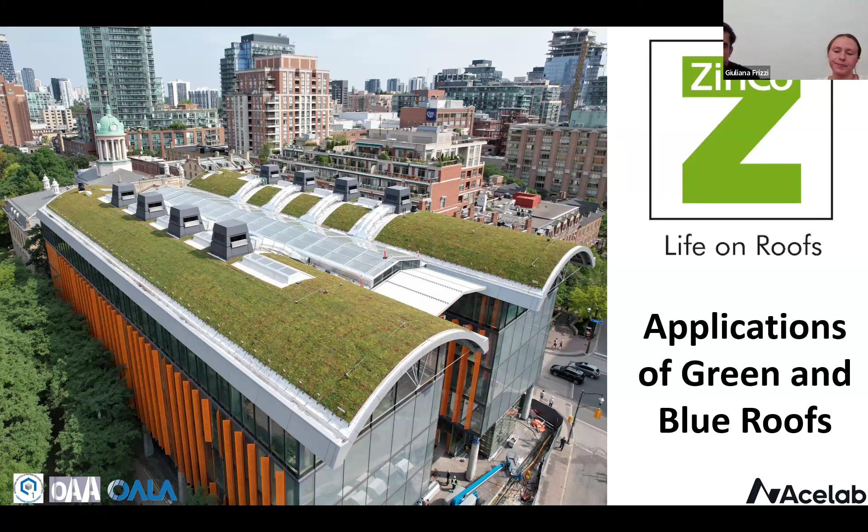My name is Jeremy Wright. I'm more on the commercial project management and roof technicality side of things, so I do a lot of the estimation and on-site project management for jobs. And I'm Giuliana, I'm the civil engineer on the team. So how me and Giuliana work is traditionally we operate as the consultants for large-scale commercial projects. So we are a design, supply, and consult company.

We used to be a full turnkey operation back in the late 2000s and up until about 2016. We are a supplier, and we basically work with architects, landscape architects, civil engineers, and building envelope engineers to specify roofing materials, but more specifically green roof materials, to create landscape spaces on top of waterproofing membrane, not just shallow, extensive green roofs. We do a lot of intensive green roofs as well. And so we're basically part of the project from start to finish.

We start with the consulting and the design work. A lot of the engineering is managed by Giuliana. We'll go through the tender phase, and then we work with the installers all the way to the finish line of the project to make sure that it's installed properly. And then we also support the project by creating maintenance plans for the various types of vegetation on the project. We're located in Toronto and Vancouver right now, but we do consulting and ship to the States. And so we're very much looking forward to dealing with more North American projects in the future.

So a bit of an agenda for today. We're going to talk about our types of green roof systems, which are built in place green roof systems. We're going to talk about growing media, a very important topic in green roofs and kind of the backbone of a good system. We'll go through the discrepancies between extensive and intensive green roofs, stormwater management, which is Giuliana's specialty, and I'm going to talk about solar as well. If there's any questions, we'll get to them at the end, but there's lots of information, so feel free to reach out to us after the presentation if you have any questions.

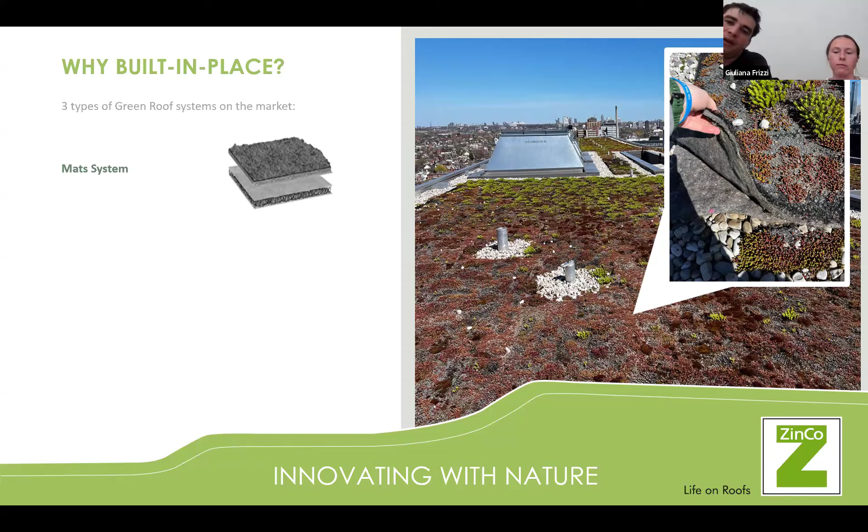A lot of the reasons why we don't do soilless systems is because we call them roofs on drugs. Essentially, plants need soil and water to survive—it's food and drink. This is what happens to a lot of soilless systems: they constantly need to be fertilized and constantly need to be irrigated. It kind of defeats the purpose of the green roof. A green roof should be a self-sustaining system that needs minimal intervention from a fertilizer standpoint and an irrigation standpoint. This is why we don't do soilless systems.

The second system that's very common in the market is the tray system. We have a lot of great competitors in the tray market space—these are plant people that do green roofs. Tray systems are very common because it's a pre-vegetated system that you can install in a 2 square foot material install. We can do trays, but we prefer not to.

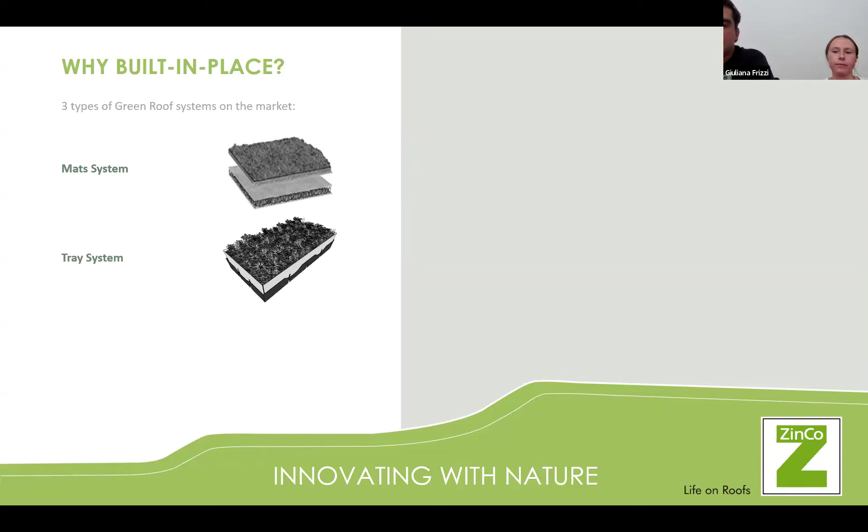The reason why is because we want to be able to customize the system and build it in place. So we are a built-in-place system. That means all of the material is brought to the roof and constructed, customized based on the vegetation type, the roof loading, the stormwater management requirements, and the configuration of the roof. A lot of roofs are irregularly shaped, so you don't have a perfect rectangle every time. That's why building the roof in place on top of the roof is the best way to do it. It's cost effective, it's bulletproof, and you can mix and match our assembly buildups based on what you're trying to build. We like to customize, and that's why the built-in-place system is what we do.

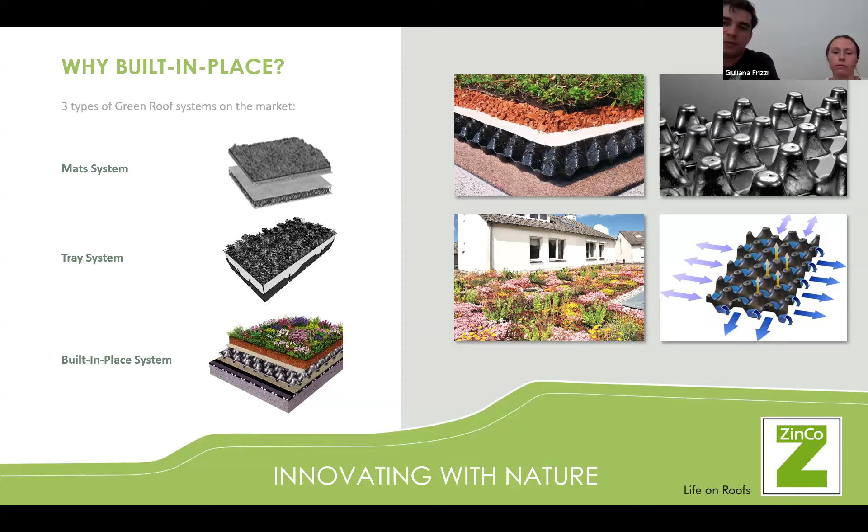When we do a built-in-place system, every layer of our system is a direct representation of a subsection of soil. What we're trying to do is compress nature into a very shallow format, and to do so you need a few different layers. The first layer that we put on top of the waterproofing membrane is a root barrier.

A root barrier is an impermeable layer. We've got two types: one with hot air welded seams, for trees or anything with aggressive root structures. The second type is a high density polyethylene sheet overlapped at about 2 meters or 6 feet, and that's loose laid on top of the waterproofing membrane, regardless if it's an inverted or conventional buildup. The second layer is a protection layer, which protects the roof from mechanical penetration or any damage in the future from the weight of the green roof sitting on top of it. Those two layers are the protection layers of this assembly.

Now, when you look at the cross section of soil, the groundwater subsection is where a lot of the water is stored. In a natural environment, the plants and these types of ecosystems that we're trying to replicate, their root systems are going down into the crevices of the rocks, trying to find that water source. A lot of the times it's very deep.

So what we do with our system is we have a water retention and drainage layer, which mimics the groundwater subsection of soil. This is like the sippy cup for the plants. It's also aeration for the soil. It's very, very important to have high aeration in the soil in order for the root systems to grow. And it's kind of our bread and butter when we deal with green roofs.

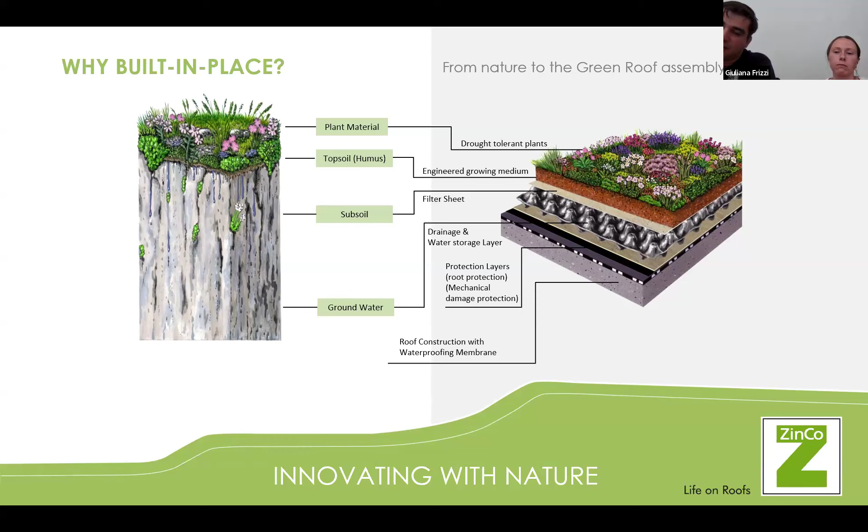And then for the plant material, drought tolerant plants, always. We do a lot of shade roofs, but they always have irrigation, and we always try to use as much native plants as possible. Those are the ones that last the longest, with a mixture of sedums as well.

So when we do built-in-place systems, and how we work from the consultant community is, you give us a design, you tell us what you want from an aesthetic standpoint and functionality standpoint for your roof space, whether it be the top roof is an extensive roof or a level 5 podium with trees. We take that information, we work as a team, decide which system is going to be best from a cost standpoint, shipping standpoint, installation standpoint, water standpoint, and then also configuration of the roof.

And then we come up with a spec. It's always kind of customizable for the project, although a lot of our systems can be replicated across multiple projects. And then we come up with a spec and we design it for the plants. The first thing you got to think about with green roofs is, what do the plants need? And then you design from there.

A lot of the times people look at what the roof needs and then they try to figure out what the plants need later on. You got to think about the plants first, because that's what everyone sees, and that's what determines if it's a successful system or not. So it's all customizable. Doesn't matter what height it is. It can be very shallow or it can be very deep. We have a green roof system for it, and it's all based on what the plant's needs are.

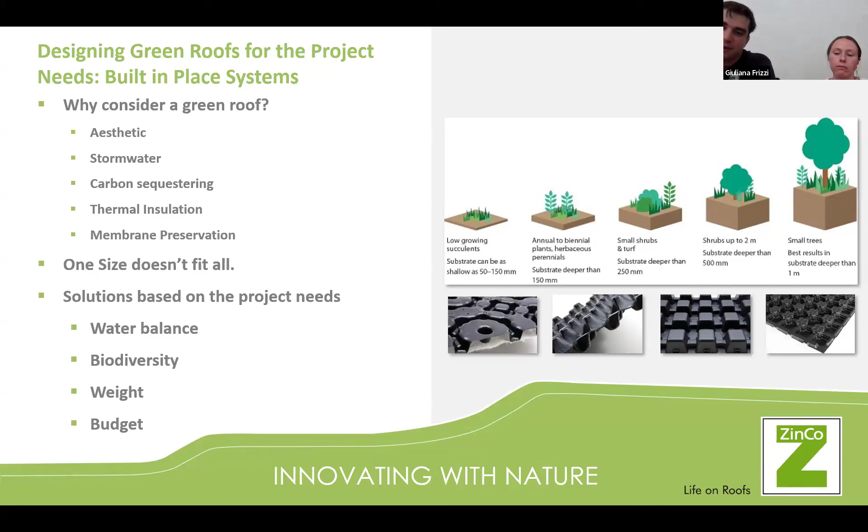Soil is a very, very important topic to talk about, because it's not topsoil, it's not compost, it's really low organic substrate. That's a good growing media. And we follow something called FLL. It's a very long German word that we're not going to try to pronounce, but it's kind of like the industry standard for a good green roof.

Now, it's an international standard. It was derived in Germany to start, but it's a standard that a bunch of different suppliers came up together to make, to ensure that the green roofs were going to have a certain quality for engineered soil, to make sure that the green roof industry doesn't suffer from poor soils. It's really important for us to follow those guidelines. It's a tough guideline to follow, but it results in really, really long-lasting and sustainable green roof solutions.

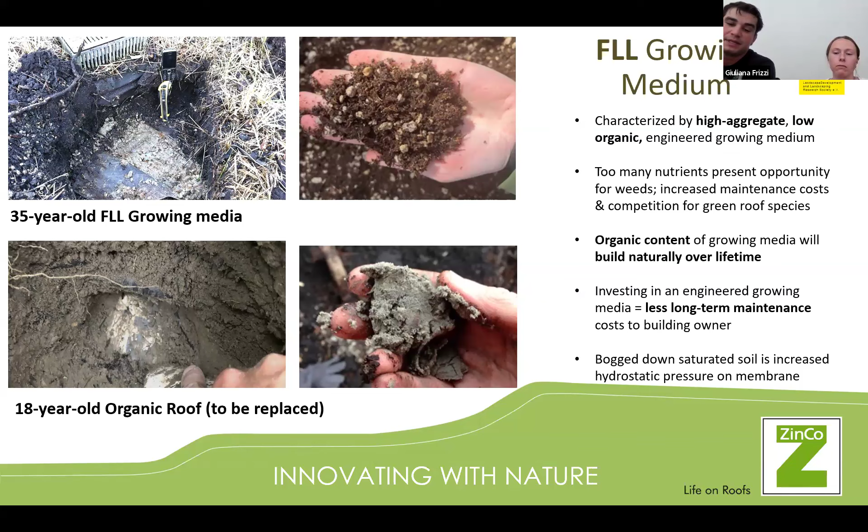What happens too, when the particles start to shrink and there's no space for air, the system doesn't drain. So they become a huge risk to a building or an asset owner, because these systems kind of turn into swamps or bathtubs. A really good example of this is a podium in downtown Toronto, 5 years old.

At the inception of the project, the substrate was going to be flush with the top of the pavers. In 5 years, this roof has degraded about 8 inches. A lot of people will say it's compaction or wind erosion, but it's not. It's actually decomposition, so it's gone into an anaerobic state. There's a lack of oxygen in the substrate.

What happens when you go into an anaerobic state in soil is these microbes start to basically thrive in an anaerobic state, and they start to consume the organic matter in the soil. That's why you see in a lot of old condos and old podiums and planters, the soil's kind of going down, down, down. You're starting to see the insulation that goes around the inside of the planter start to expose itself, and that's decomposition of the soil.

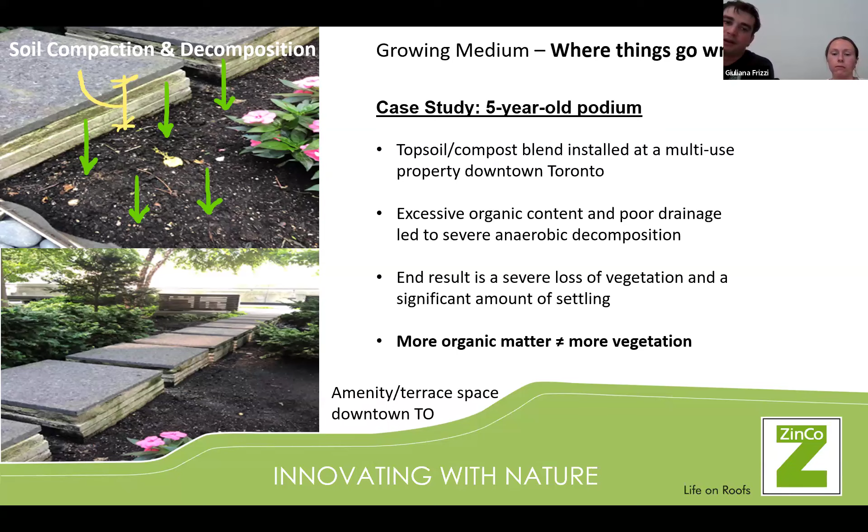So this is, you start with a cheap soil to install it. Everyone sees the price tag and says, okay, I'll go with the top soil on my podium. But podiums behave a lot differently than a ground level landscaping job. So this soil starts to compact or decompose over time. You have to bring that soil back up to the roof—this is a $300,000 fix, which could have been avoided if they had just bought a proper green roof soil. So we want to avoid this because it's not sustainable, and we just want to make things work and make sure they're bulletproof.

Throughout the presentation, we'll go through the 3 basic systems that we like to classify our green roofs with. The extensive green roof, which you're probably very familiar with, are those top level, typically non-accessible green roof sections that just have minimum soil depth and a sedum species.

So it's very low maintenance. We like to then classify a middle zone as a semi-intensive green roof, which we allow to have a bit more growing media depth, which allows a lot more flexibility in the type of vegetation you can support. And then we go for our intensive green roof systems.

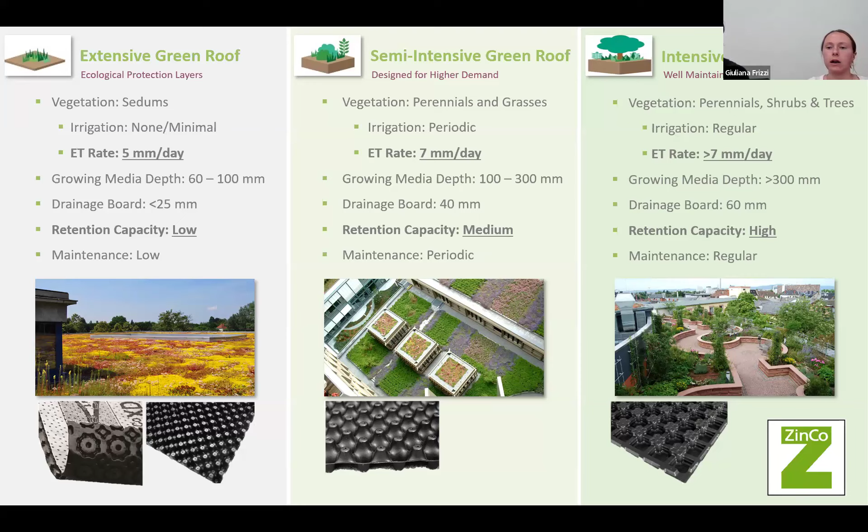These are our amenity levels that have transitions from walkways to trees to planters with different types of perennial plants, and just a large capacity of an accessible space.

So first off are extensive green roofs—again, the ones typically that you don't access, but you need to meet some of your green roof codes. This is our shallowest and most lightweight system. It supports only succulent-like species like sedums. Again, we like to try to keep them more installed in this system.

This one shows an inverted buildup. As Jeremy described the layers of the system, you'll see that we start with our root barrier, and then we actually put our insulation on top of it. Then we have a diffusion membrane on top of the insulation. So you really want to keep that insulation allow air to go through it, but doesn't allow water to go through it, because we don't want to waterlog our insulation, so that reduces the effect.

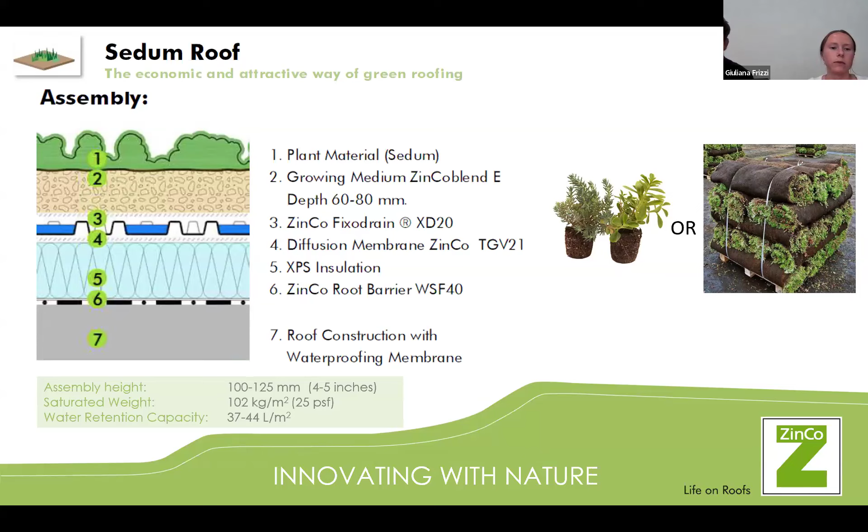So for planting methods, we like to have plugs, which are those little baby plants you see in the first image on your left. And then there's also an option for sedum mats, so they just roll out directly, like kind of like sod rolls. And then they allow for instantaneous growth, but sedums over a growing period will have that coverage that you need.

Just as a little example on our installation process, first we start with this root barrier. We put this across the entire roof underneath both vegetation areas and vegetation-free zones, whether they be simple gravel maintenance walkways or any type of accessible paver space.

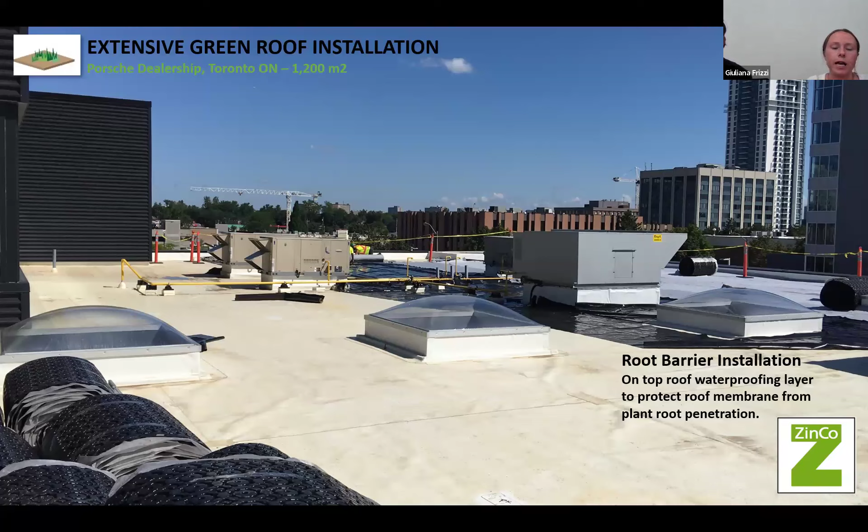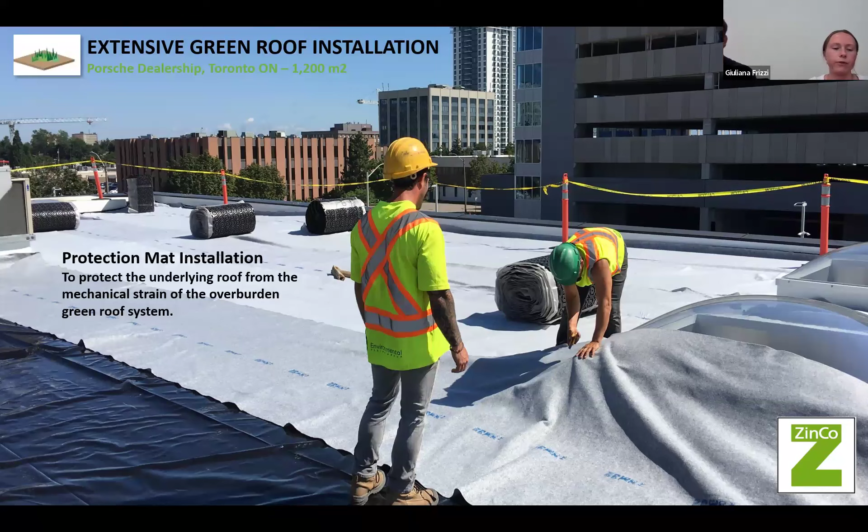And then we go with the protection mat. This is a conventional roof buildup. We go with this more fabric-y layer to protect against the mechanical strain of the overburden for the green roof system. This goes across the entire roof, underneath green roof, vegetation-free zones, maintenance pathways, and any type of amenity space.

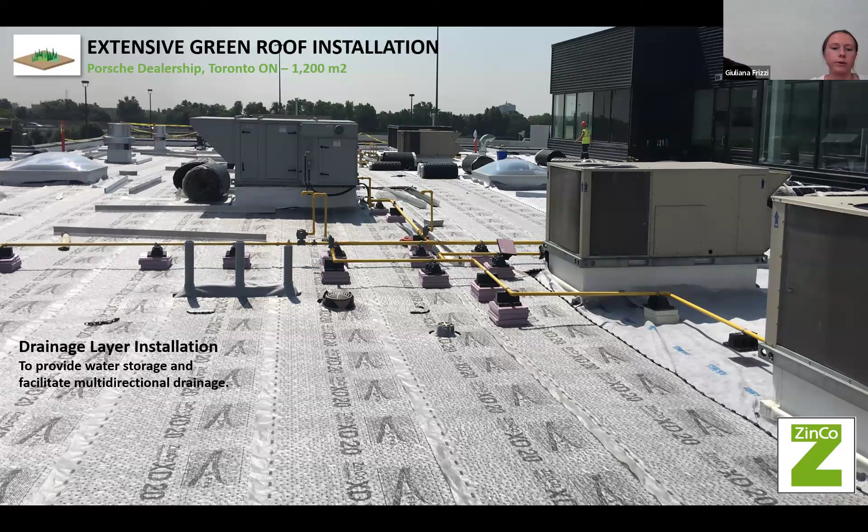And then we have a drainage layer. We like to install this across the entire roof, underneath all different types of greenery or hardscaping, because we want a consistent drainage layer across the entire roof. We want water to fall anywhere on the roof and be able to access the drains. We don't want any impedance of that water movement, because we want to prevent that bathtub effect you might see on some roofs with greenery on them.

And then we install our growing media. There are a lot of ways to get the growing media up to the roofs, either large bags craned up or blower trucks. You can see there's a lot of red color to our growing media - that's the aggregate that we use. The best thing about this is the aggregate acts as a ballast, so it keeps all the layers talked about before down on the roof, nothing's blowing away.

And then we can actually leave this over the winter periods, depending on your installation timeline, and plant later on when it's ideal for the plants. So this can be walked on by all the other trades on your roof, and you don't have to worry too much about coordination with construction timelines.

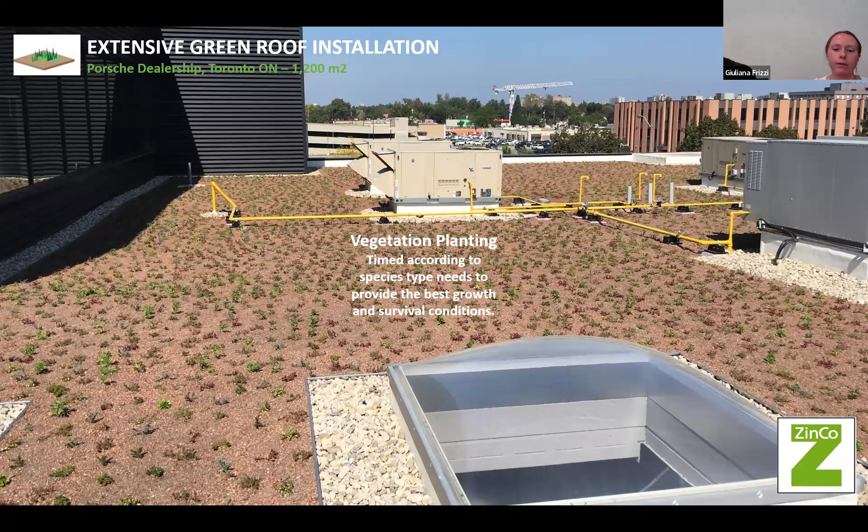And then after you plant the roof, when all the trades are done and the season is right for the plants - this is an example where we did plugs planting, so you don't have immediate coverage at the time of installation. You can see there are pockets with some spacing in the plants, because we really want the plants to grow where they want to grow. We have some that are better for sun areas and some better for shading areas, so we want them to compete and thrive in those designated areas.

And as you can see, over one growing season, they actually become pretty full coverage. So if your client is allowing for a little bit more timeline for that plant growth, this is a cost-effective option.

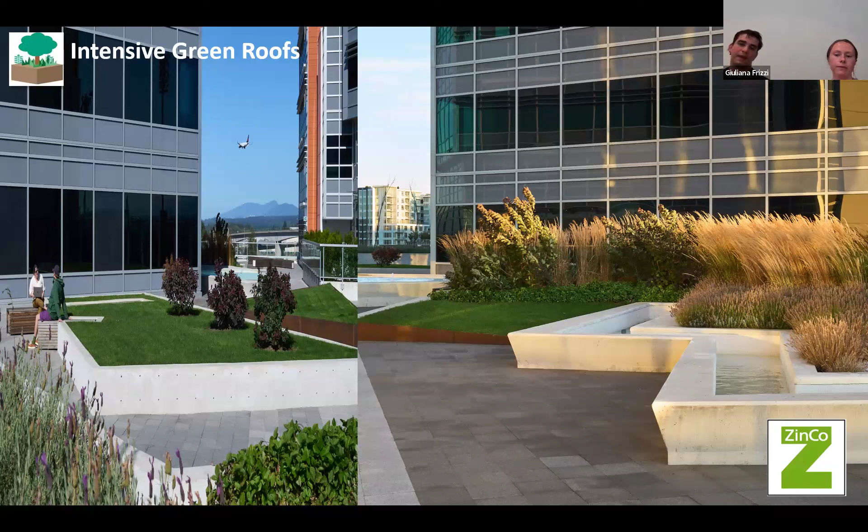Similar to what Giuliana just mentioned about protecting the roof during installation, that principle still applies for intensive roofs, and even more so. The images we're looking at right now are of a podium - this is a level 3 project, but every component on this roof, including the hardscape, the Corten steel edging, the water feature, and the vegetation, is on one continuous drainage layer. This roof actually has zero penetration. We're huge proponents of avoiding concrete doweling or concrete planters going directly into the waterproofing membrane - it creates a thermal bridge, and I'll go into some of those details in a sec. But this entire system has no penetration to the waterproofing membrane, and everything is built directly on top of our FD40 drainage layer as well.

So our generic intensive system for cost-effective and shallow growth is called a perennial garden. It's very similar buildup to our sedum system, but here we've increased the substrate to about 6 inches. Our definition of an intensive roof is basically anything a foot or above - a lot of different municipalities say 6 inches, but regardless, as soon as you hit 6 inches of substrate, you can start growing some pretty interesting plants. You don't need as much plant or substrate as you think.

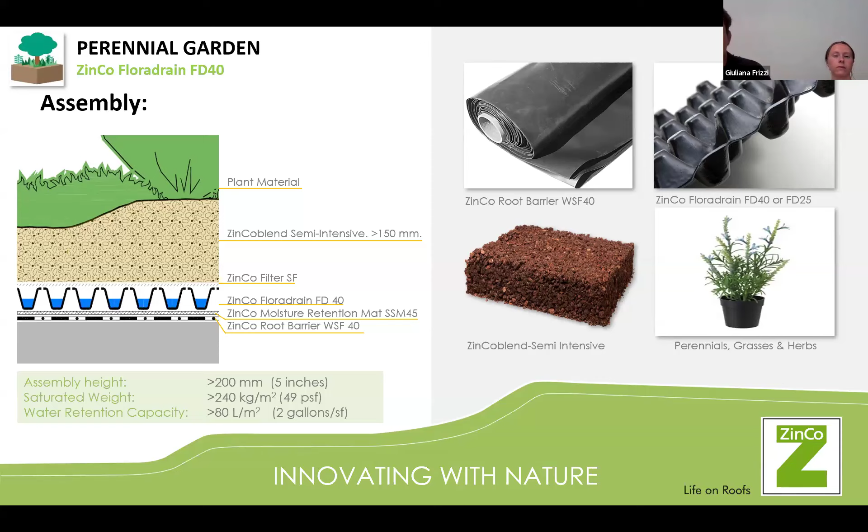What we really specialize in is lightening the entire landscape roof into a smaller green roof sandwich, by adding a water retention layer. You can see in our cross section here, it's called FD40 - about a 2-inch water retention board. Taller plants and deeper root systems need more water retention, so we've increased the water retention through our drainage board. This is an example of what a podium or parkade install looks like for us.

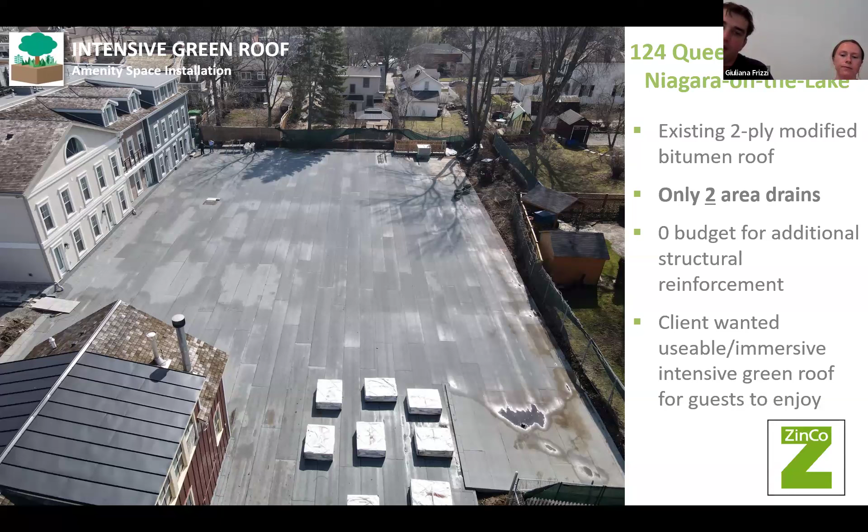It's tough to see from this image, but this is a conventional roof. Insulation is below, but there's only 2 drains on this roof. This entire roof that we're going to build through this sequence of photos has no penetration to the waterproofing membrane. It's one continuous horizontal waterproofing membrane. We were able to delete the concrete curbing into the waterproofing membrane through our drainage board. So 2 area drains, and you're going to see a lot of landscaping happen.

So the first layer that goes down is the root barrier. That's the WSB 100, a hot air welded seam. It's continuous across the entire roof because we're going to put trees on this roof. Tree roots can grow 2 times the size of its canopy, so you can't just put the root barrier in the planter. You have to put it everywhere.

Whenever you approach any type of roof that's got plants on it, root barrier needs to go everywhere. The second layer that goes down is the protection mat. So root barrier goes down first, then the protection mat, and then the third layer is the drainage board.

As you can see here, we've got little concrete blocks all in little squares around the roof, and we call those concrete pedestals. This is a leveling mechanism that creates a perfectly level and robust system for a planter to sit on without having to add all the weight of, say, an aggregate or an HPB. So we create these curbs on top of the drainage board to create that level surface and reduce weight.

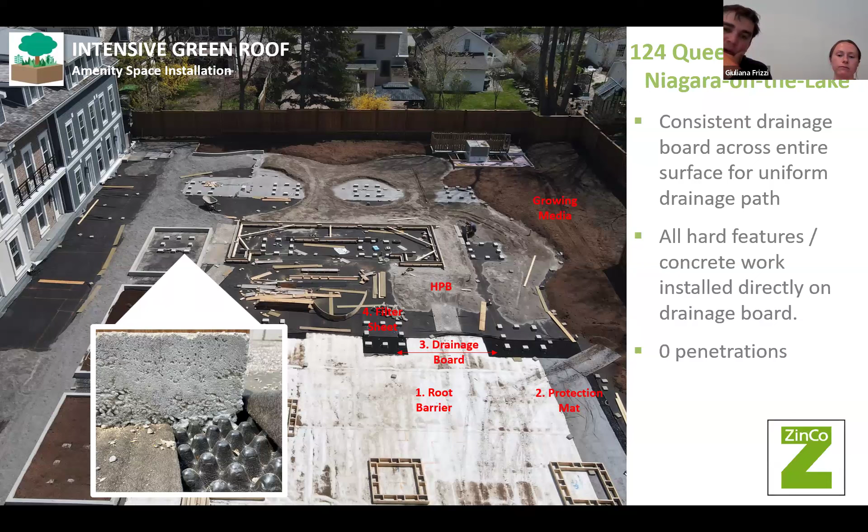The fourth layer is the filter sheet. Filter sheet goes across, depending on what your buildup is, but it's going to go across the vegetation and the aggregate as well. Then the formwork that you see is where the curbs are going to go, and these curbs are going to get poured directly into the drainage board.

The detail that we're trying to avoid is this scupper detail. When you see a planter wall that's doweled directly into the waterproofing slab, there's a few things you're running into. One, you're creating a thermal bridge, so you're losing energy through the building by penetrating that insulation barrier. You're also creating a potential bathtub because the scupper is going to be the flow path for the water, and it's going to be buried.

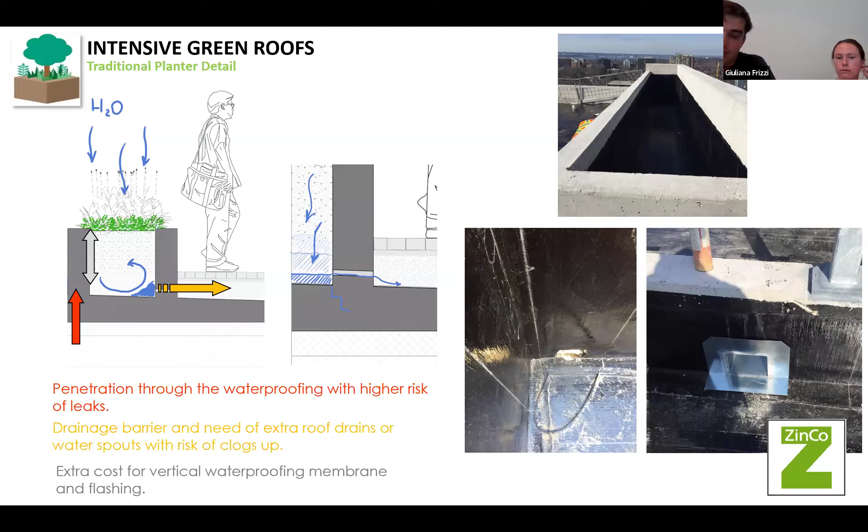The third detail you're dealing with is a very tough waterproofing detail. Where leaks happen a lot on podiums or amenity spaces is the transition from the horizontal waterproofing membrane to the vertical. So what we're trying to do is delete that vertical transition and keep it monolithic on a horizontal plane, by pouring the concrete directly into the drainage board.

People always ask about seismic, specifically on the West Coast. We typically have to stamp our own engineered drawings for this approach, but the benefit is that you're going to reduce the risk of the planters turning into a bathtub.

Your install rate is going to be at least 30% higher than a traditional detail, because the roofer comes in once and does one horizontal surface, and then the landscaper comes back and does all the drainage board and concrete work. You're also reducing the amount of drains that you need on the roof.

Traditionally, if this was a planter doweled into the roof slab, you're going to have an area drain within the planter and an area drain in the hardscape. When you do this approach and the water is continuously flowing through the drainage board, you can reduce those area drains by quite a bit. Typically, every area drain on a commercial building adds about $15,000 of mechanical work, so that's a lot of savings.

How the drainage board works with the concrete formation is, because it's three-dimensional, the concrete actually takes the shape of the drainage board. It's not suspended above, it's fitting into the grooves of the drainage board, and there are air pockets throughout it that allow the water to go through.

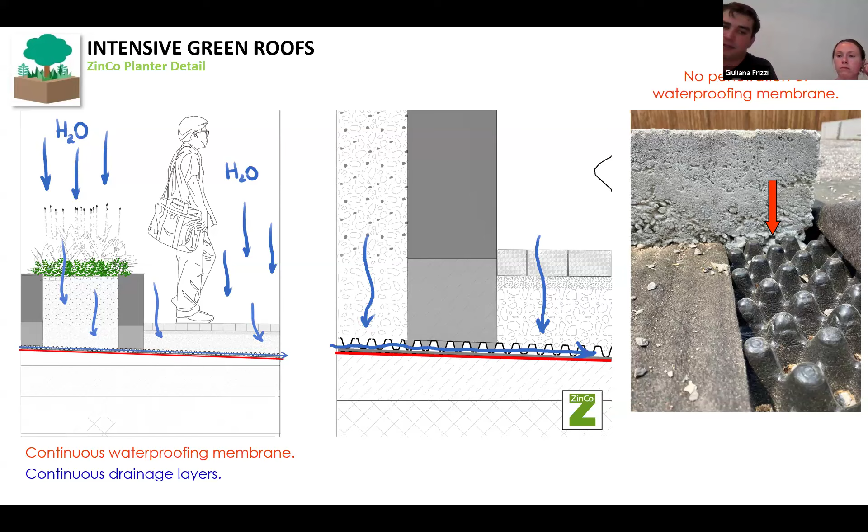From an installation standpoint, this entire roof is built on FD40, including the water features, the planters, the hardscape, those concrete curbs, the turf, and the landscaped area. So one horizontal waterproofing membrane, one drainage board, and only 2 drains on this roof. That's how we can make jobs a lot more efficient from a detailing standpoint and a constructability standpoint.

So the next topic we'll go over are what we like to call stormwater management roofs. These are ones where we like to add a little bit more water retention and detention to these systems.

Just a little background, there's a difference between retention and detention. Retention is the amount of water that is completely stored in the green roof system and does not discharge into your municipal sewer system. Water falls on the roof, gets stored in our growing media, drainage layers, and retention mats, and then it evaporates back into the atmosphere.

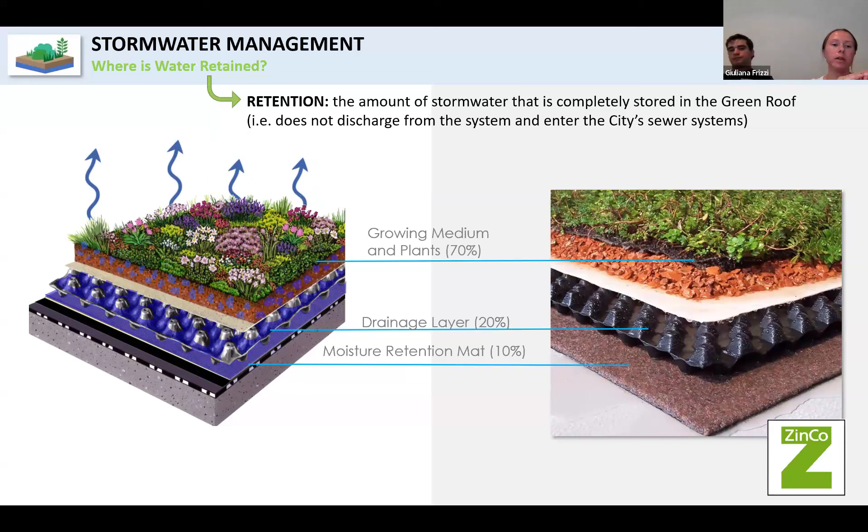The next kind of stormwater management practice is detention. Typically you have an underground detention tank, and this is water that falls on your project site that is not actually retained by your greenery system, and definitely not retained in your paving system. You have to capture that water and then slowly delay its entrance into the sewer system.

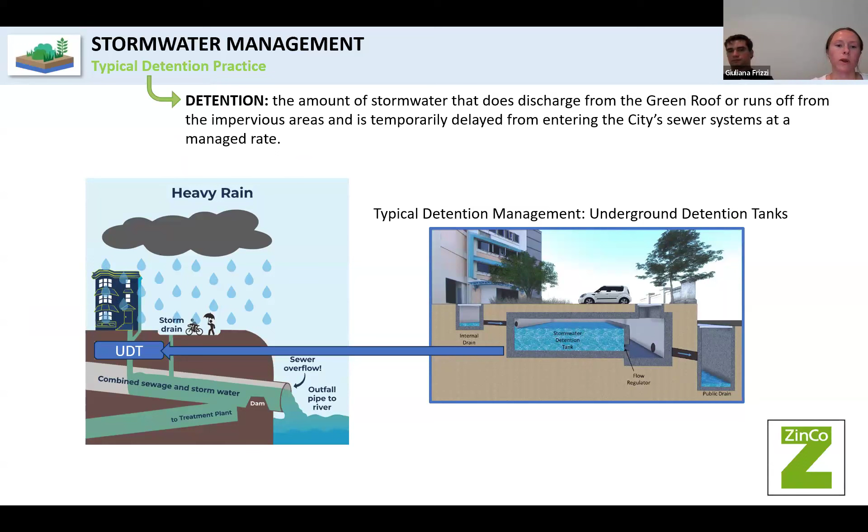So what we want to do is move that detention space up into the roof level. We have a detention spacer element that can go underneath the pavers, extending all the way from extensive to our intensive systems. Again, we want to have that uniform drainage layer across the entire roof, the same system across the entire roof. This spacer element is what provides that volume for water storage.

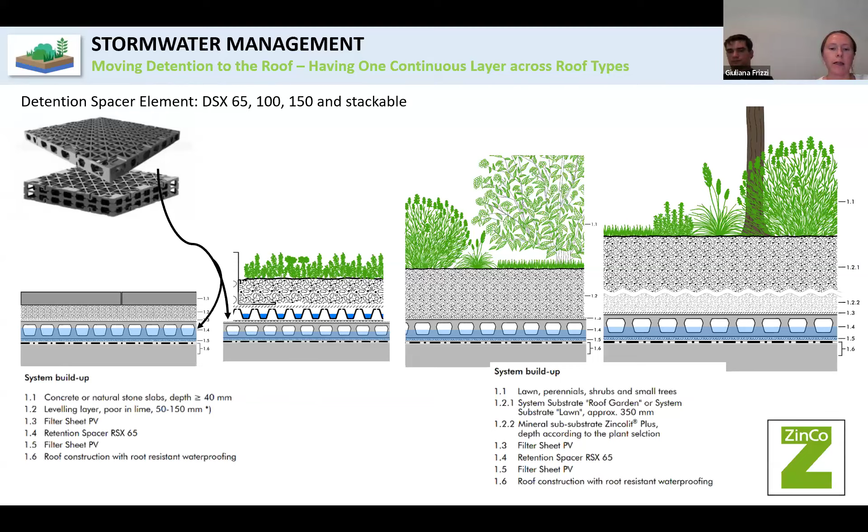The other aspect of a detention element is a control drain. We want to mimic that orifice that you typically have on those detention tanks. So we have what we like to call a runoff limiter, and it fits on any of your area drains.

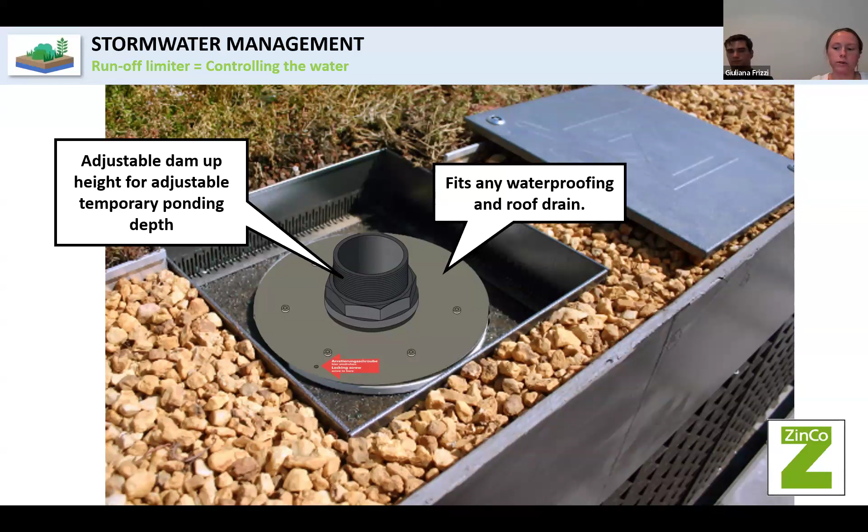It has an adjustable dam up height based on whatever your building codes allow for temporary ponding water on your roofs. Once the water goes above that designated design depth, it just overflows. It also has an adjustable opening at the bottom, which we communicate with the civils to let us know what we need to set this at for the release rate off of the roof.

So in combination, we're shrinking those underground detention tanks, we're moving that water up into the roof, and we're saving a lot of money in that aspect.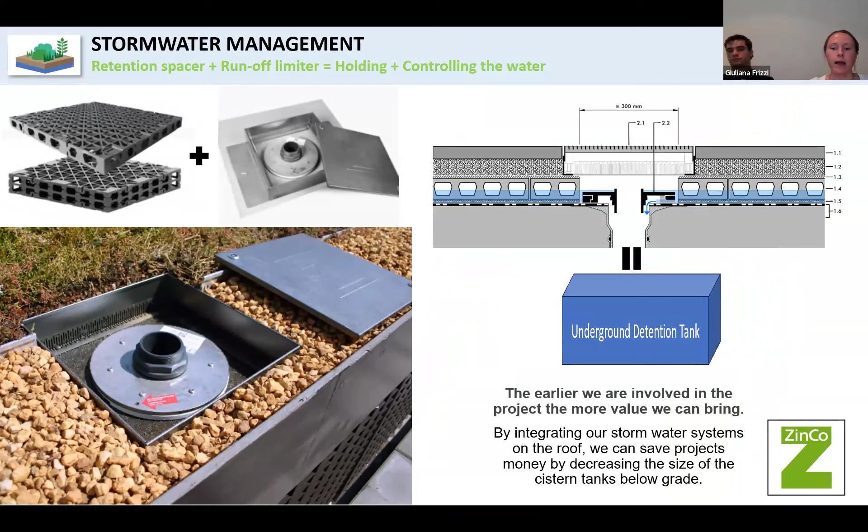So just as a little case example of how this works on a roof: a roof with 2% slope, you're actually only having water pond around the roof drain. If you can see in the detail, you'll have that designated depth of water storage only at the drains. As you go farther and farther away, it actually gets shallower and shallower. So you're not really maximizing your blue roof potential.

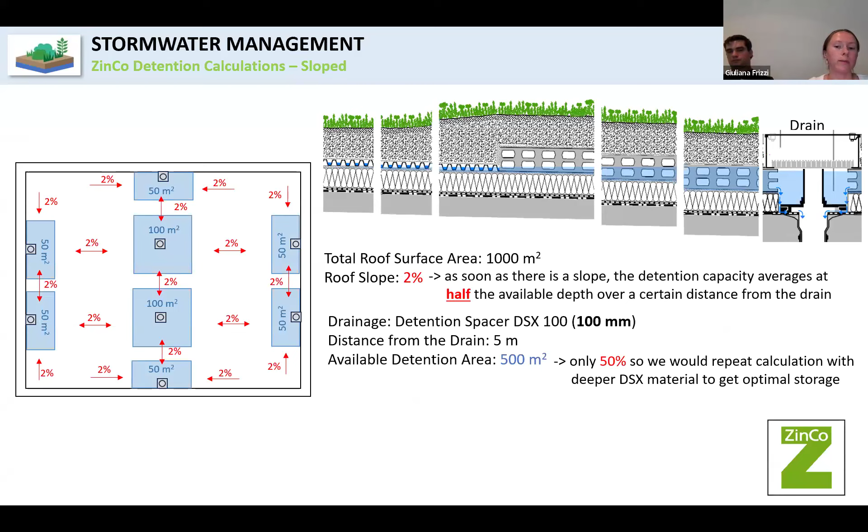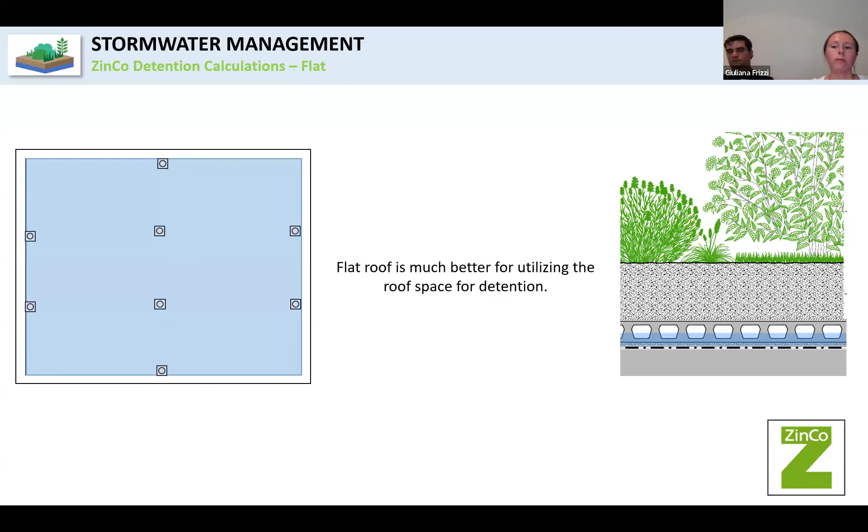What we could recommend is increasing that depth of that detention spacer element, but again, we have to work within the building code regulations. Or what we like to then promote is a flat roof. Flat roofs are a lot better for utilizing the entire roof space for detention. You don't have to worry about any type of slope factors or calculations around that. It's just a uniform layer across the entire roof, and you know that there's going to be the same depth across the entire roof.

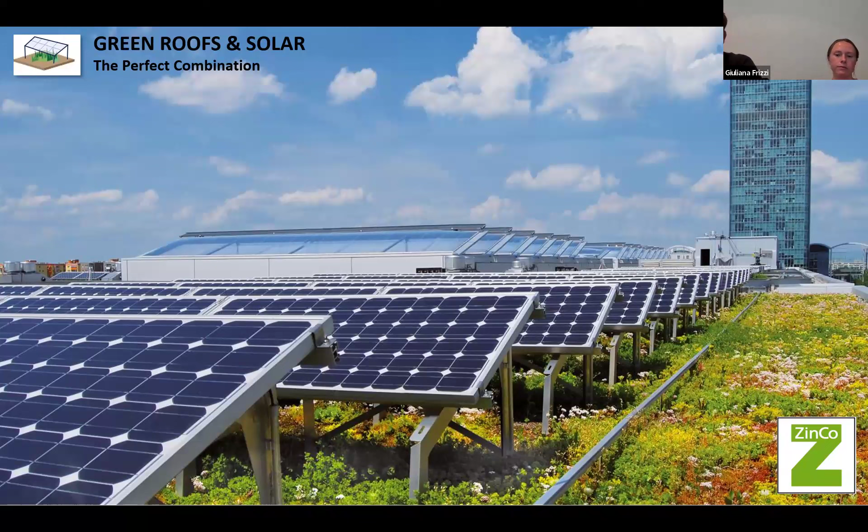Further to what Giuliana was talking about, like integrated engineering solutions, on top of blue roofs, we also do solar as well. With green roofs in general, a lot of people know them as these kind of dormant, monochromatic looking green roofs. Sometimes they look really great, and sometimes, depending on what you paid for, they look kind of crappy. So what we really like to do is integrate either solar or water harvesting into the systems, because you can capture a lot more benefit than a traditional green roof.

So solar is really starting to catch its wind, but I know that the bill that just got passed in the States kind of just hammered all the tax credits for solar.

So I'm not sure what's going to happen there. But solar is at a really important point, because economies of scale have reduced the cost of solar panels. So from a financial standpoint, it makes a lot of sense to use solar whenever you can.

When you're dealing with a project that has a stormwater requirement and an energy requirement, a lot of times you're fighting for space on the roof. We see lots of roofs where solar panels are on one side of the building and green roofs on the other. You might as well just integrate the two, because the green roof itself can actually optimize the energy modeling of the system.

So wind uplift is a huge concern with solar panels, which kind of dictates what type of degree you have to put your solar panels on.

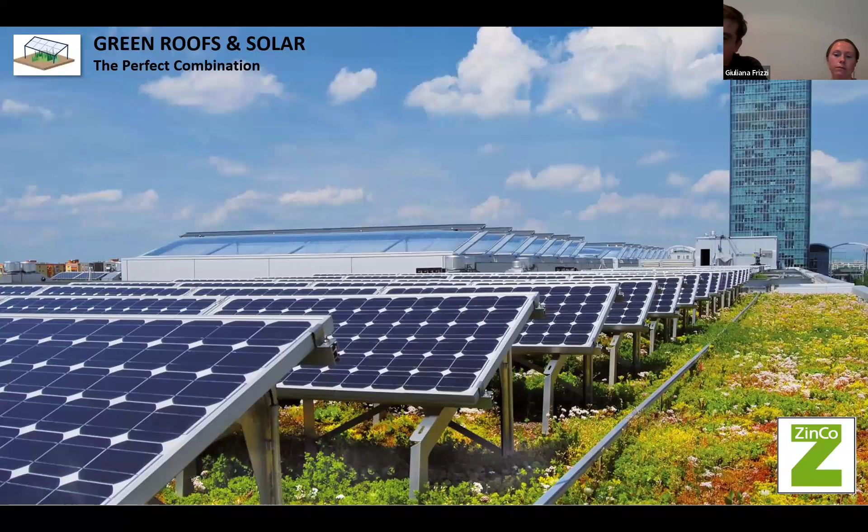25% efficient is pretty low. With a green roof, you're actually going to increase it by about 5%. That doesn't sound like a lot, but when you're increasing something that's 25% efficient and you add 5%, it's actually quite substantial. The green roof effectively cools the ambient air temperature around those panels through the natural plant biological processes of taking up water, storing it, and transpiring it into the atmosphere.

So how we approach that is we actually use a non-penetrative solar base, and it's compatible with different racking. We do manufacture our own racking as well. Ideally, what we're using is 4 to 6 inches of substrate and a distributed point load.

When you ballast a typical solar panel, a lot of times you're using just a cinder block, and it's a 2 square foot cinder block. With the green roof, how we can increase the wind uplift efficiencies of these systems is with a 2 square meter solar base that's a distributed point load. So it's not just one specific area that's got a lot of weight to it—it's distributed over 2 square meters.

There's a lot of different ways you can do this. We actually have a system now that's in a vertical configuration as well. What we specify from a panel standpoint is always a bifacial solar panel—a panel that takes UV energy on the front half, and also captures energy on the back half from any reflection off the roof. It's beneficial for the plants too, because it allows UV to get through and lets the plant sustain growth.

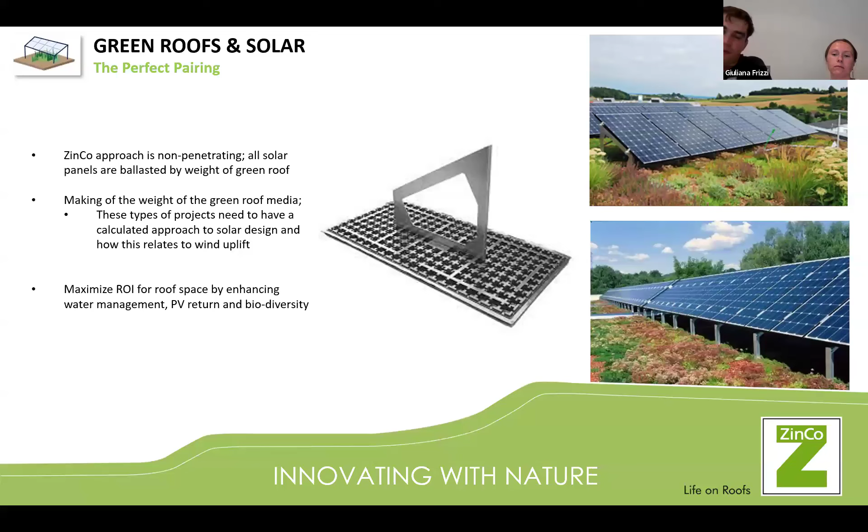From a traditional installation standpoint, this is what it looks like: drainage board goes down first, the solar panels are installed based on what the racking providers have spec'd out, then substrate goes in. The roof should not be planted until the solar panels are installed—you don't want the solar panel installers to walk over your plants.

This is a really remote island in Georgian Bay, a few hours outside of Toronto, with extremely high wind uplift. The solar panel system considered before actually couldn't satisfy the wind uplift with just traditional cinder blocks, so the green roof supported the wind uplift instead. This site is going to experience 150-kilometer-hour winds and storms, and with 6 inches of substrate—8 inches in some areas—it's going to be fine.

So it's a really, really interesting approach to doing solar and combining the two, specifically in off-grid projects as well.

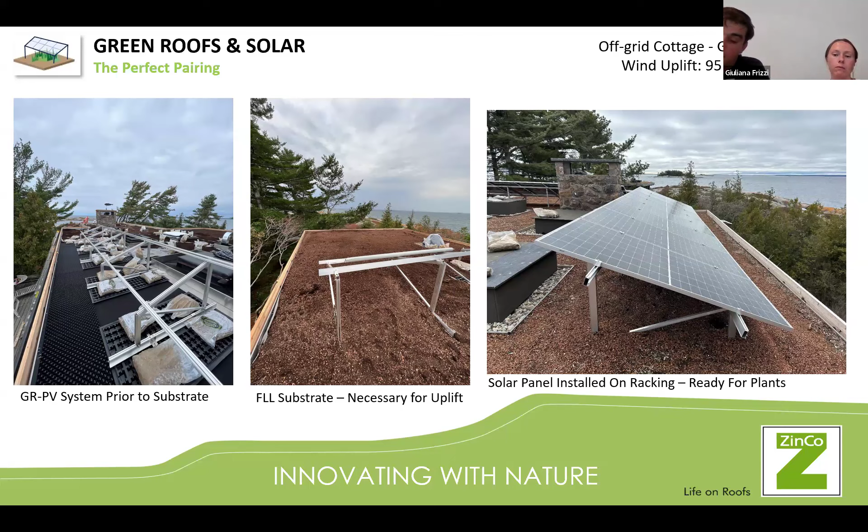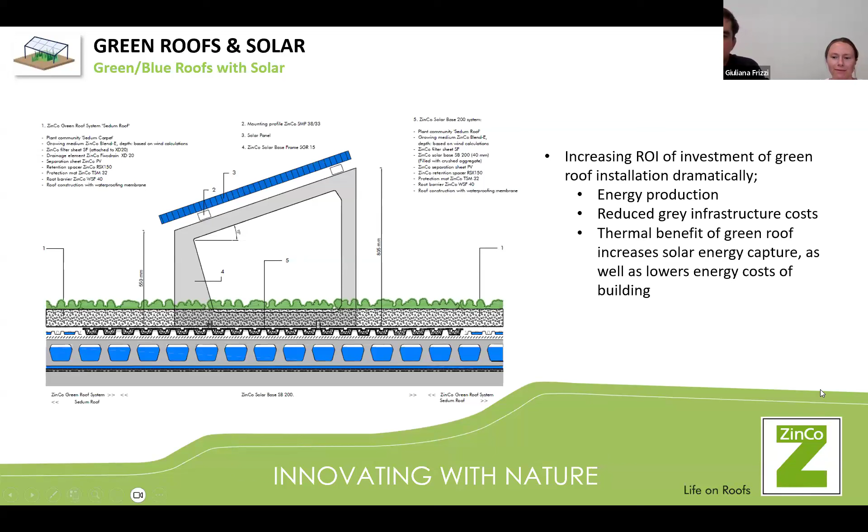Yes, and this is the vertical configuration I was talking about. This is brand new to the market. It's really interesting because you're specifically in areas with a lot of snow in the winter. When you design a PV project with a lot of snow, you assume there's going to be a decrease in energy capture in the winter months. With a vertical configuration for green roof and solar, you're basically foregoing the risk of snow piling up and covering your PV panels. We're seeing a lot of studies — the first one's in Oslo, showing 30% higher output compared to a conventional array in the winter, just because the solar panels aren't capturing any snow in the vertical configuration.

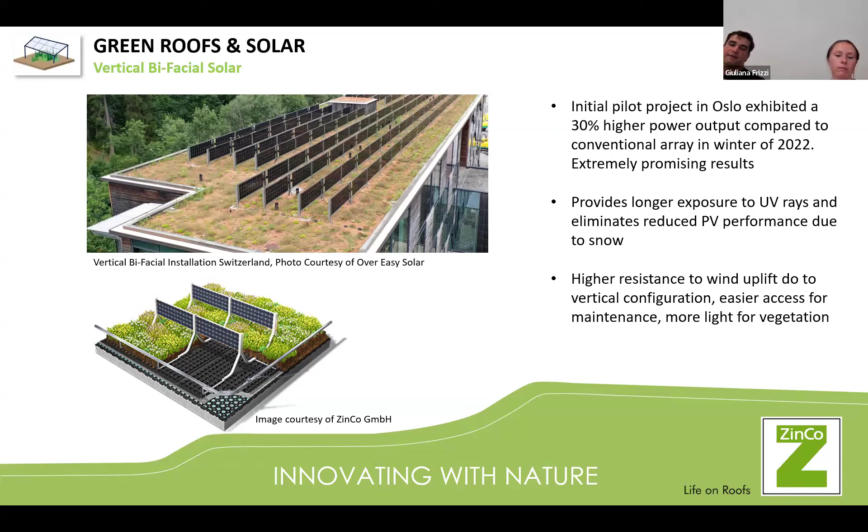This is a really interesting configuration from a wind uplift standpoint and a maintenance standpoint as well. It allows maintenance contractors to walk freely amongst the roof. It also brings up a really hot topic right now, which is agrivoltaics — the combination of solar and agriculture. Unfortunately, we haven't actually done an agrivoltaic roof in Canada or the US yet, but it will be coming. We foresee this being a very useful tool for projects that have high wind uplift, maintenance requirements, and a lot of snow.

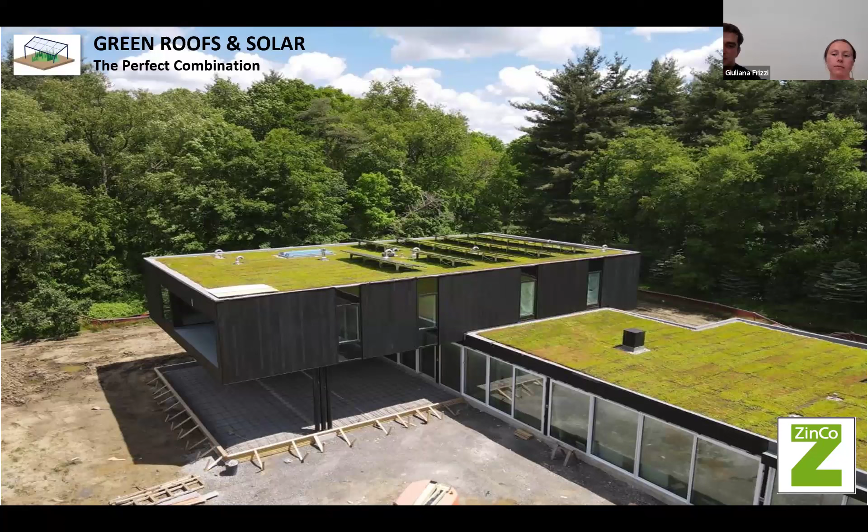And this is how it looks in installation as well. This is what we work on with our sister company, Sponge — they're a microgrid company, so they do a lot of energy management controllers. We always include energy management controllers and an optimized layout in any of our projects, commercial or residential, and always have a battery backup as well. It's not necessarily about blanketing the entire roof with solar — it's designing a system optimized for the energy consumption of the building. As much as we'd like to sell more solar on roofs, a lot of the time the costs just don't make sense, so making the system smaller and more optimized makes a lot of sense.

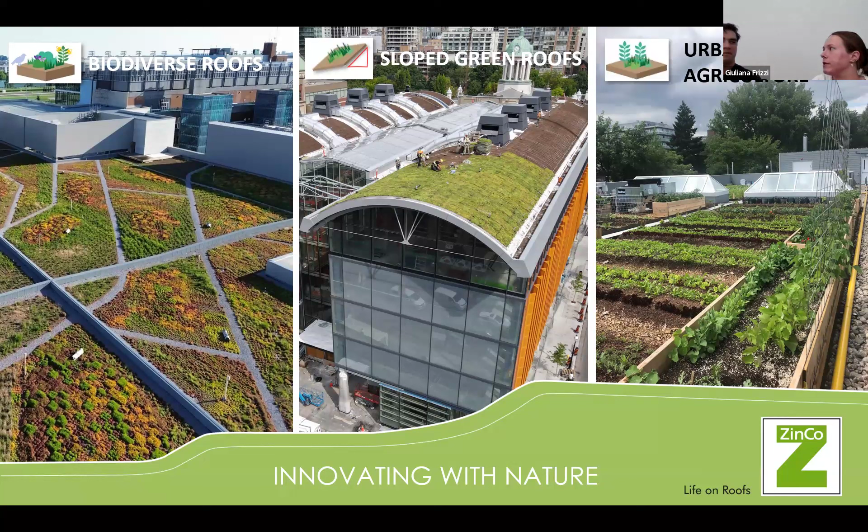Just to save some time, we want to let you guys know we do different types of green roofs as well. We do more biodiverse green roofs, which are semi-intensive green roof systems that allow for more plant and animal variety — we have a lot of bird and insect habitats on these roofs. We also do slope green roofs — this is an example of a barreled roof, but we've done projects anywhere from 10 degrees to 50 degrees. And we also do urban agriculture, so rooftop farms.

And just as a little conclusion, what we always offer for you — we really want to work as a sub-consultant for you guys, giving you all of our knowledge for green, blue, and PV systems, and being able to stamp those solutions as well. So you guys have confirmation that the systems we present are okay, and then implementation — the actual installation, the actual production of these materials that you guys are specifying. Thank you.

That concludes it. Any questions from the chat? I was trying to find my microphone. Sorry — yeah, there's actually quite a few questions, so we can go ahead and jump right into them if you guys are ready. Definitely, cool.

One of the first questions is wondering if they can have a copy of this presentation — is that something you guys are willing to share? Sure. Awesome, yeah, we'll get you guys connected so we can share the PowerPoint. And then the next question, I think something you already kind of talked about a bit, but maybe you can confirm — somebody's asking if wind loads are an issue and how you address this.